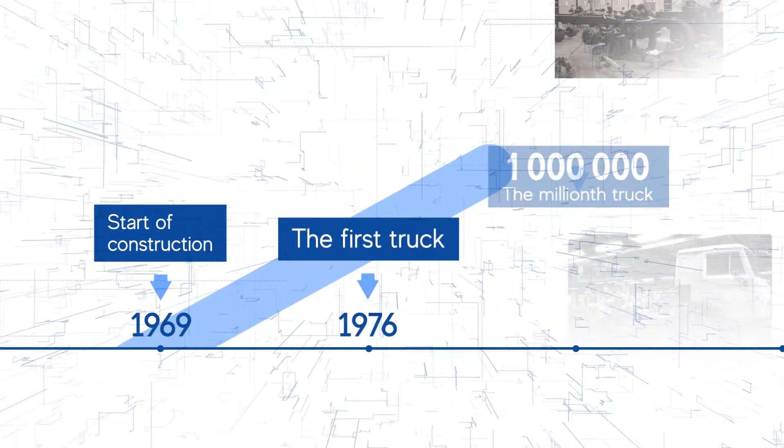As early as February 16, 1976, the first truck rolled off the plant's assembly line. A relatively short time later, KAMAZ gained the upper hand in the industry when they manufactured their 1 millionth truck. KAMAZ was built by the people, hand in hand with the whole nation.

It achieved success and passed through tough times, from which it emerged stronger and better prepared for future successes. The new era demanded enormous changes from the whole country. KAMAZ was up to the challenge, and by 2012, its production number had hit 2 million.

Today's world poses new challenges for KAMAZ. Safety, sustainability, and comfort requirements are changing. Business competition is becoming tougher. Technological standards are changing. Fully aware of the need for large-scale changes, KAMAZ is implementing a massive comprehensive re-engineering project.

The history of KAMAZ, like any other history, develops in a spiral. Several years ago, it became clear that we were approaching an era of pivotal changes. The key reasons for change were the obsolescence and physical deterioration of assets, the Fourth Industrial Revolution, and customers' new product requirements.

The re-engineering of all major processes, especially manufacturing, with the parallel development of a new modern vehicle line, is a vital tool enabling KAMAZ to enter a new historic stage. The history of vehicle manufacturing has never seen such projects, neither by scope nor diversity. Despite the hard time, we are implementing a global re-engineering project, since it's a matter of vital importance regarding the future of KAMAZ, a priority no matter what the circumstances.

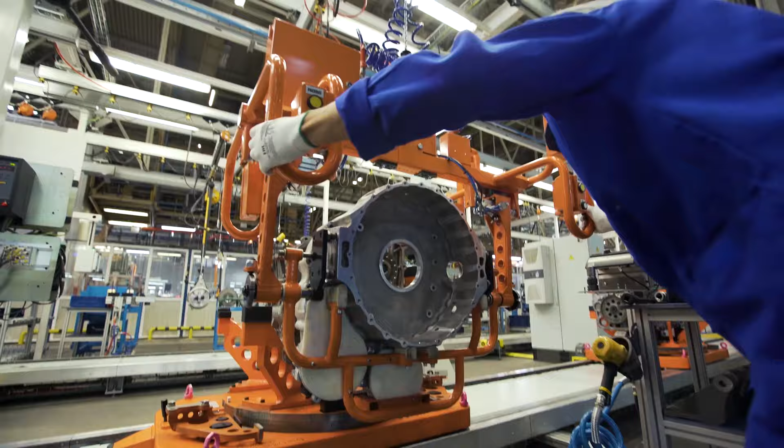Re-engineering of KAMAZ is a big and huge transformation of KAMAZ from the past into the future. What we are doing is absolutely unique in the world. We are on one side introducing a complete new truck generation with a complete new cabin, complete new engine, complete new powertrain, new frame, existing axles, and a complete new electronic architecture.

In parallel, we are introducing and executing a new IT landscape for KAMAZ, which will enable KAMAZ to develop it further on up to a level of Industry 4.0.

The R&D project is key within the framework of the Advanced KAMAZ Vehicle Line Development Project. The R&D Center answers for a full range of research and engineering activities directed towards developing vehicles that meet international standards and remain unique in many aspects.

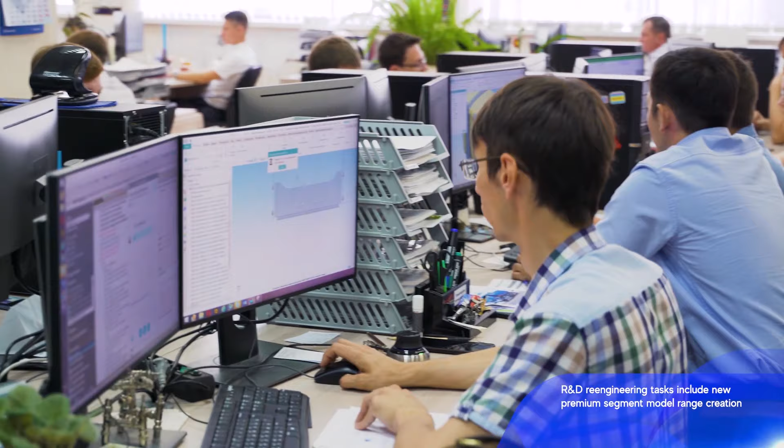The project is faced with the tasks of carrying out the research and development of K5 generation cab shell vehicles, which conform to modern interior and exterior design trends, taking over research and development in electrics and electronics for this advanced vehicle line, covering the research and development for a new generation engine family.

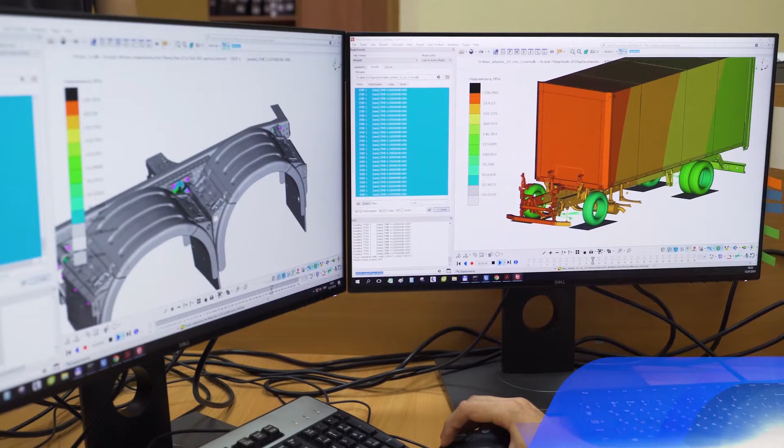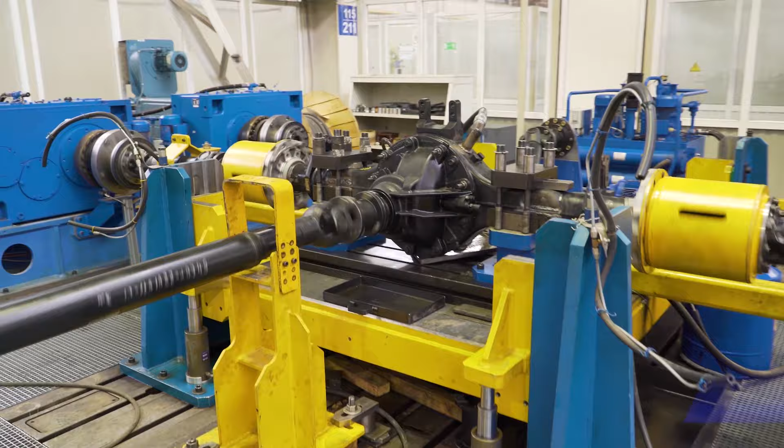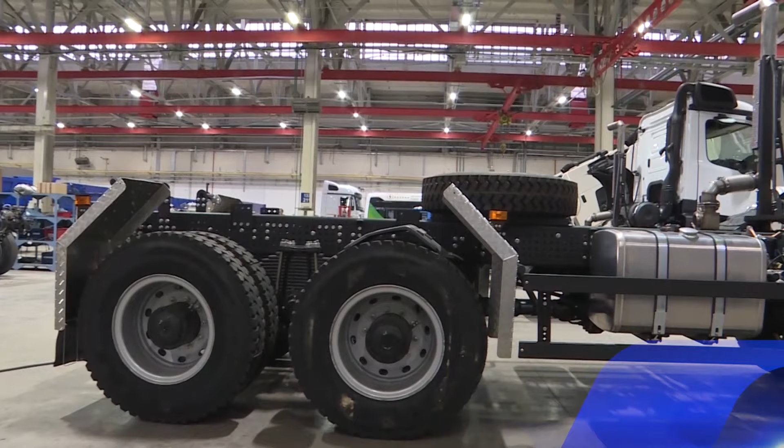The research activities, constructional design and processes engineering activities are carried out with the help of modern computer-aided design and simulation systems, which allow for the development of a new product faster and more efficiently. Designing, virtual testing, and manufacturing of a digital twin are followed by components and assemblies, bench testing, as well as test assembly of vehicles in the R&D Center.

The new model range dominates in terms of its ownership cost and cost efficiency. Service intervals have been increased by 80%. Fuel efficiency has been improved by 10%. Service life has been increased by up to 1,200,000 kilometers.

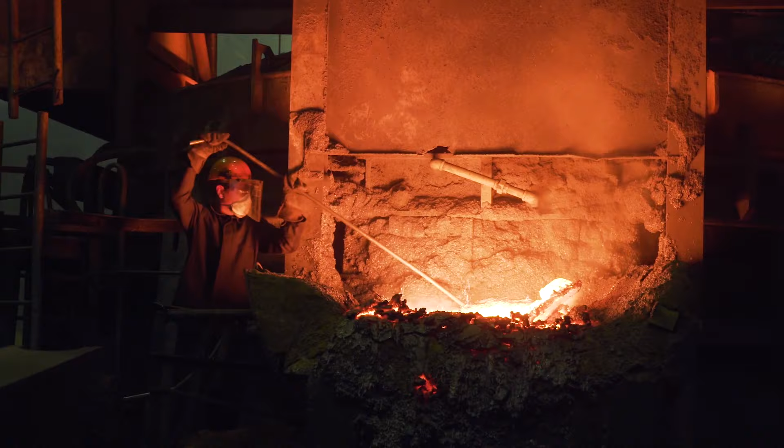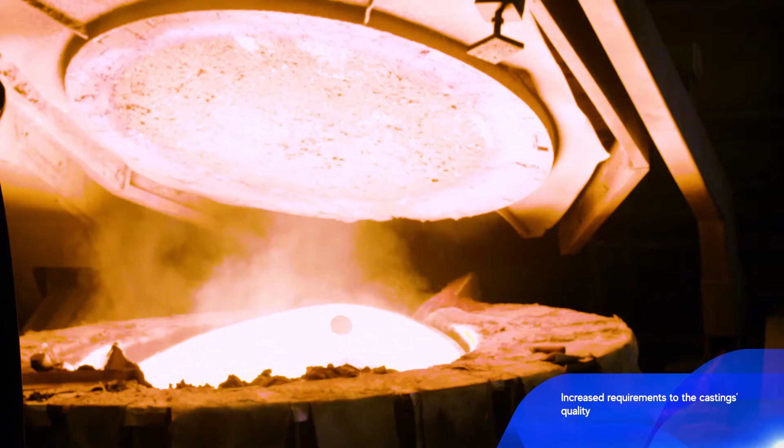KAMAZ starts at its foundry. That is why the modernization starts here. Cast iron production re-engineering provides for the development of a compact and high-performance foundry, focused on the production of intricate castings made of cast iron alloys, meeting strict casting quality requirements.

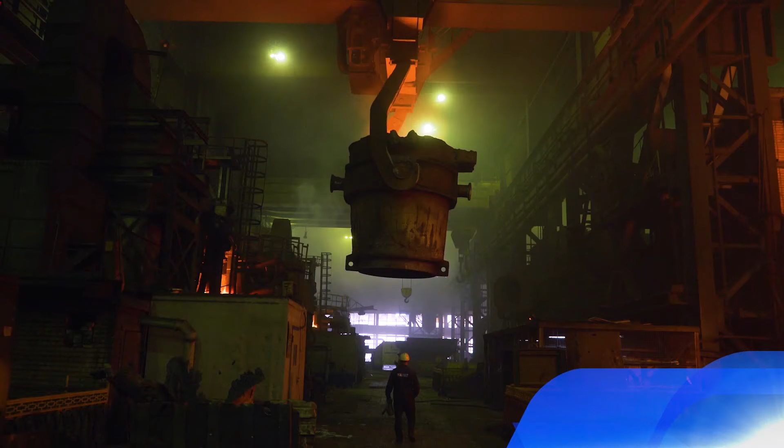Production capacity optimization due to reorganization, modernization, and new equipment procurement will allow us to significantly enhance capacity load as well as labor quality and efficiency. As part of the re-engineering of the KAMAZ truck group, the foundry will also be upgraded to feature the latest equipment and processes in the foundry industry.

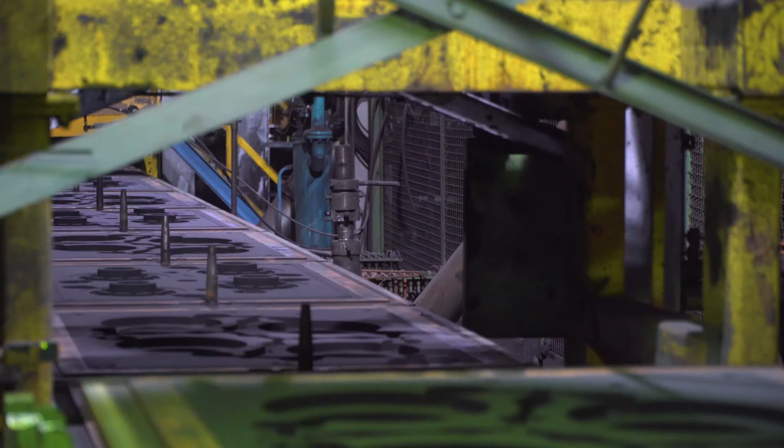The melting, molding and core shop departments will be upgraded, and we will also use software such as artificial intelligence to improve the products of KAMAZ Foundry. The re-engineering project will also enable us to cut the space needed for production premise areas in half, reduce the lack of staff and outdated equipment, all while keeping with current production volumes.

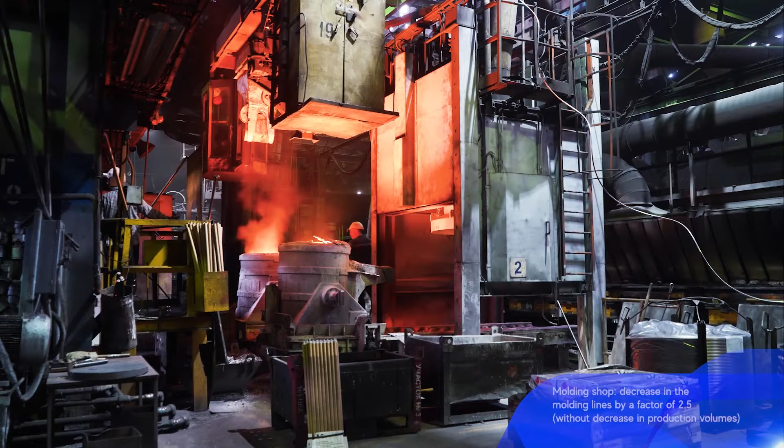For instance, take the melting shop, a 3-time decrease in the outdated melting and holding furnaces. The molding shop, a 2.5-time decrease in the molding lines. The core room, a 4-time decrease of the process equipment is planned. The equipment selection process, along with technical work, flow and foundry re-engineering is in progress.

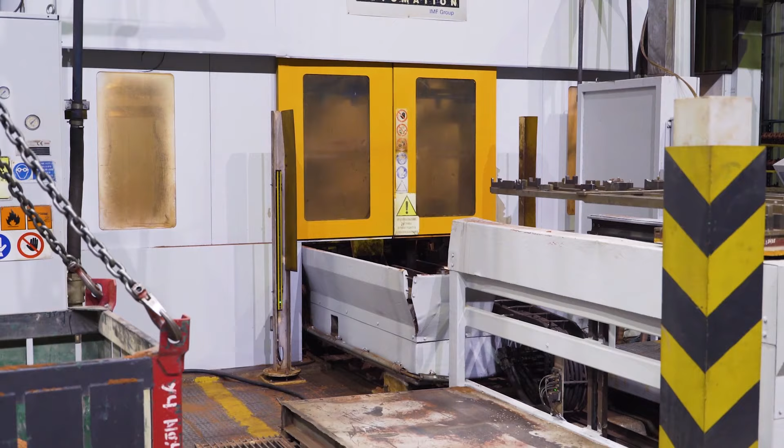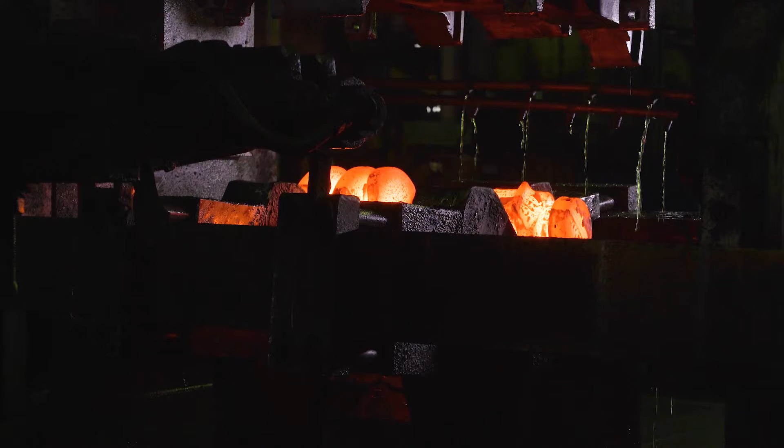Here, the most critical vehicle parts are produced. Here, the metal passes through fire and water and is forged by a force of 12,000 tons.

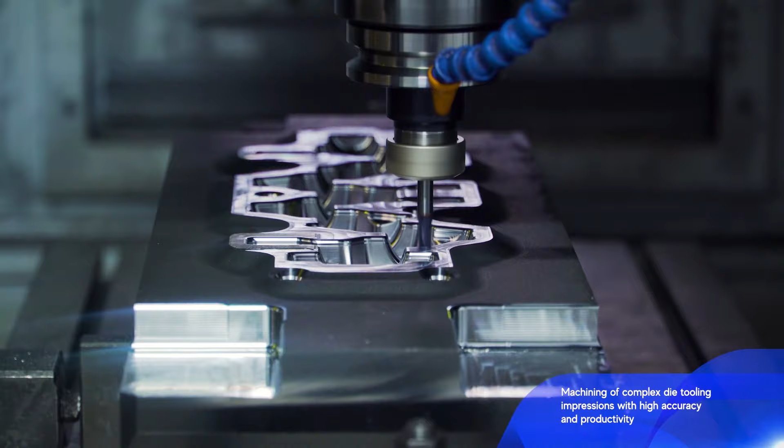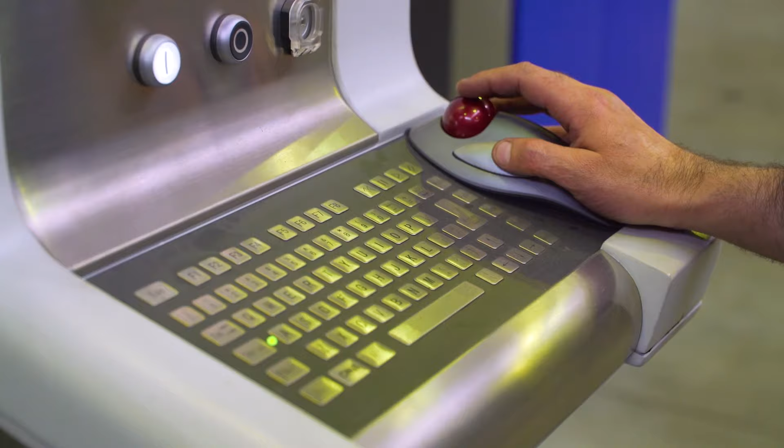The use of hot stamping processes, simulation for all forgings, and 3D designing of die tooling makes it possible to quickly perform process preparation to produce new forgings, including crankshafts. High-speed milling and tooling EDM allow processing of complex impressions of die tooling with high accuracy and low roughness, thus eliminating subsequent machining, which speeds up production, improves quality, and reduces production costs.

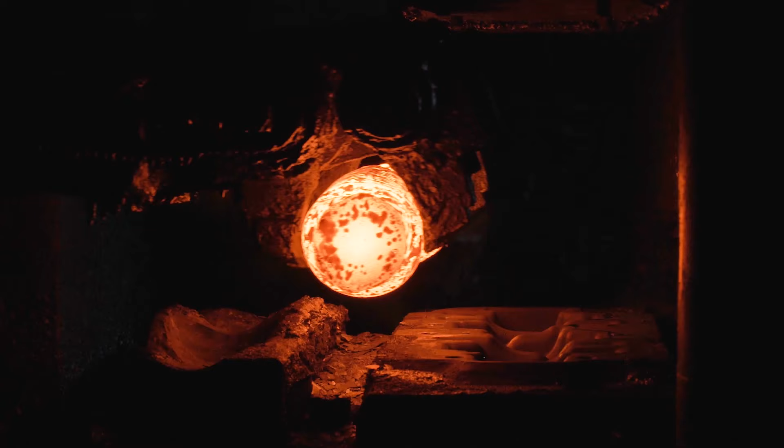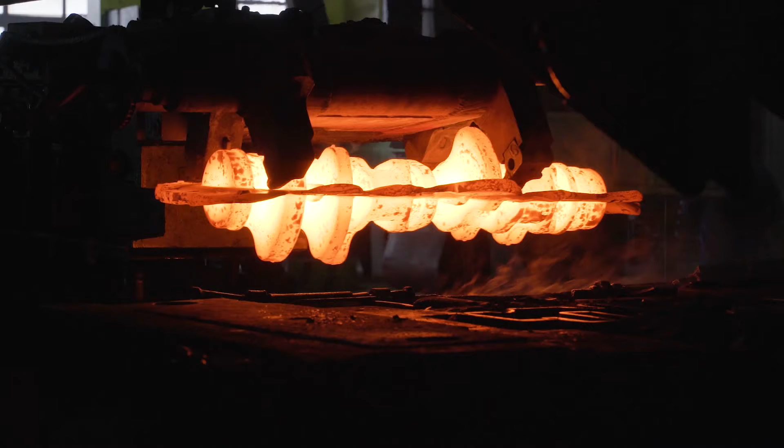An automated forging line based on a press of 12,000 tons has been in operation since 1976. The modernization of the line will ensure that the forging quality and the production process are up to international standards. Other activities mastered within the project framework include the use of self-hardening steel, controlled cooling, and heating of workpieces using thyristor frequency converters.

Engines are the heart of KAMAZ automobiles, so to ensure that they are reliable, fuel-efficient, and ecologically friendly, we use the most cutting-edge technology out there. The project for the R6 engine production is one of the most important parts of the re-engineering process. The project provides for maximum localization.

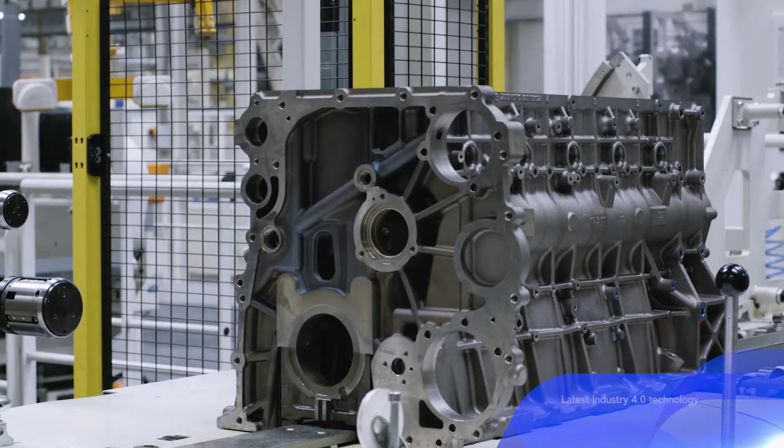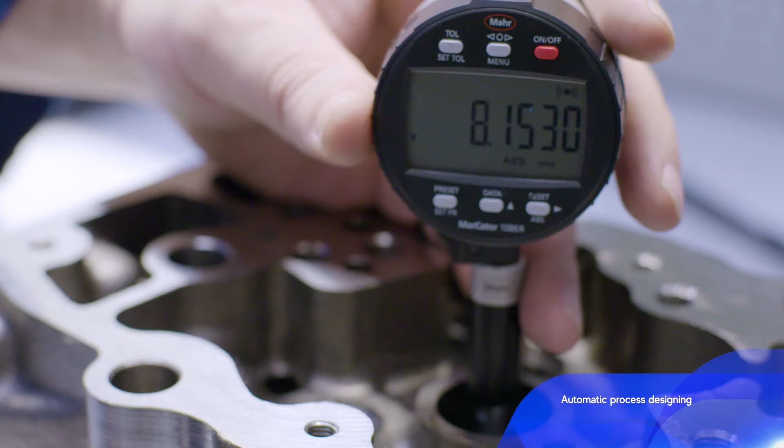State-of-the-art equipment from the most modern global machine tool manufacturers has been introduced to manufacture critical engine parts. The concept of engine parts production, assembly, and testing is based on modern technologies, rapid equipment maintenance, dimension control during machining, and production process control automation.

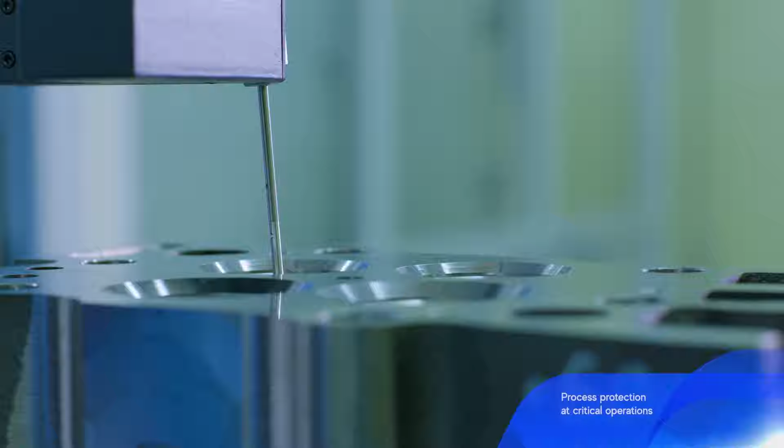Machinery is equipped with a traceability system that ensures control for compliance with the technological process. 100% control of key parameters and tool wear is provided for, along with statistical data analysis and complete equipment monitoring.

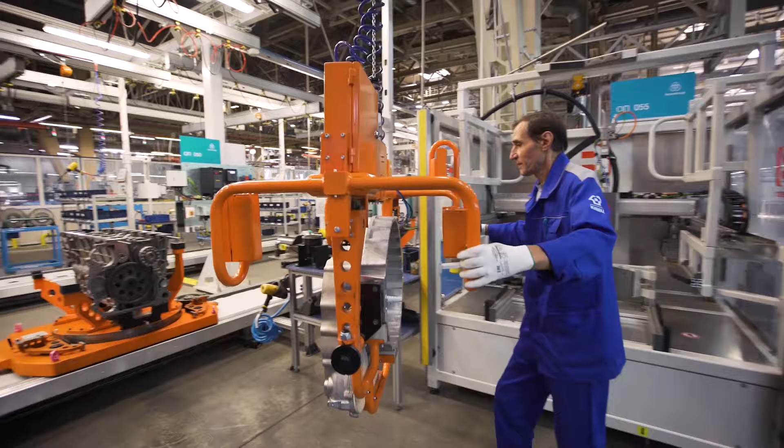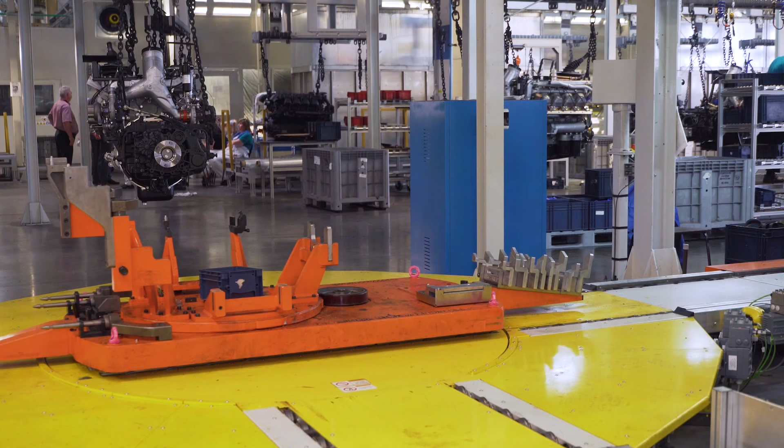The engine as well as the powertrain is assembled on pallets with the help of modern assembly systems and fixtures that are equipped with a data carrier containing assembly information.

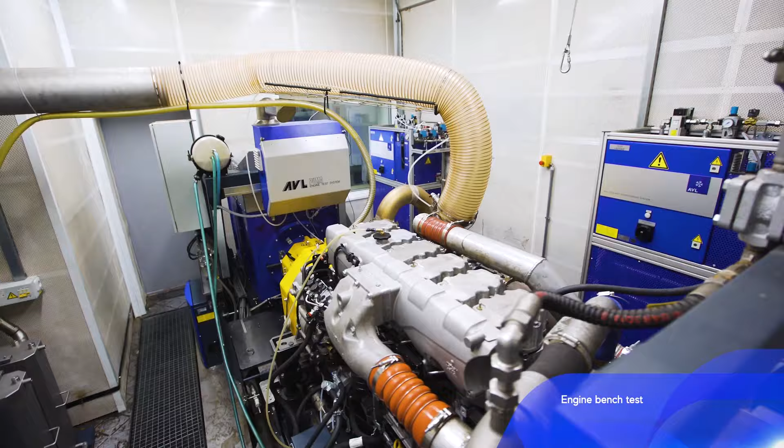To assess the actual performance of an assembled engine's operation, engine bench tests are conducted. Engine running, obtaining operational characteristics, and engine adjustment are carried out on the benches simultaneously.

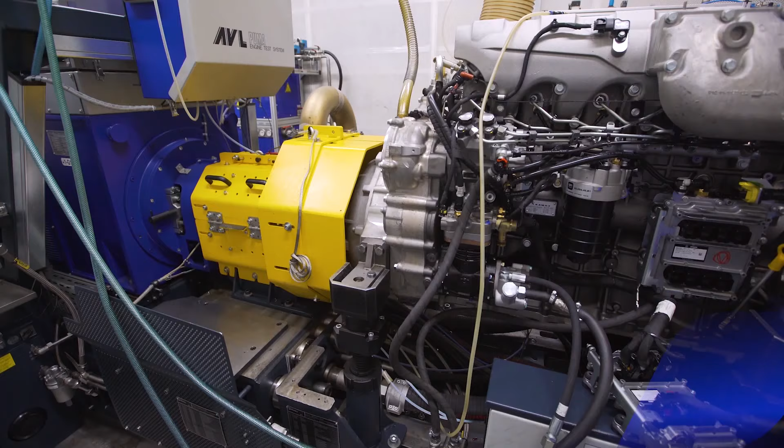The implemented technologies require a high level of personnel competence, production engineering, and production culture.

The main production shops of the press and stamp plant are welding and painting, pressing, and small series production. Re-engineering is carried out in all these areas.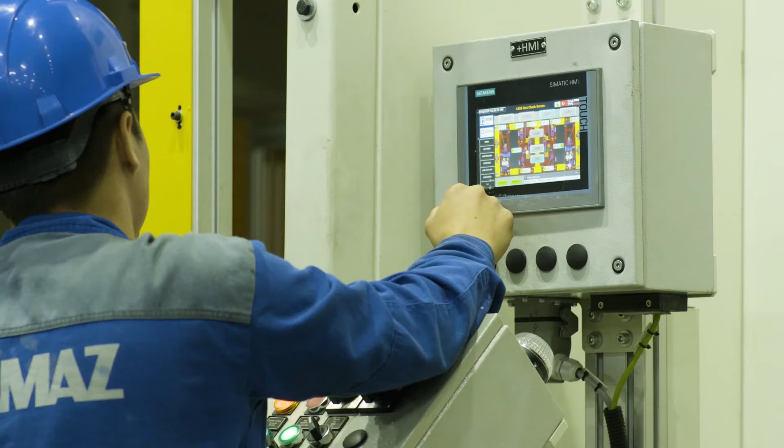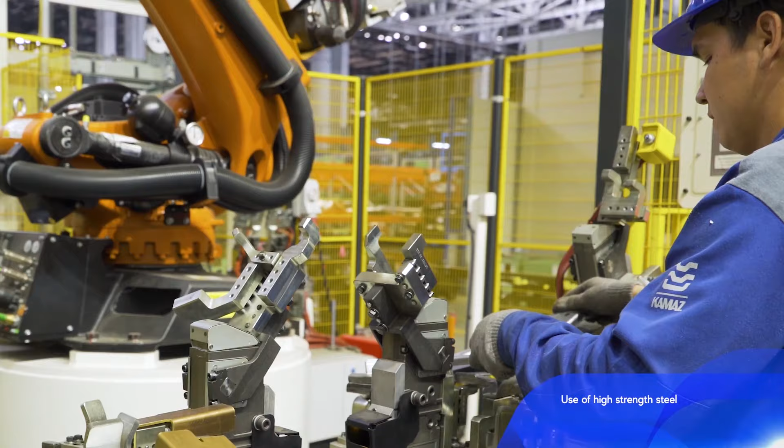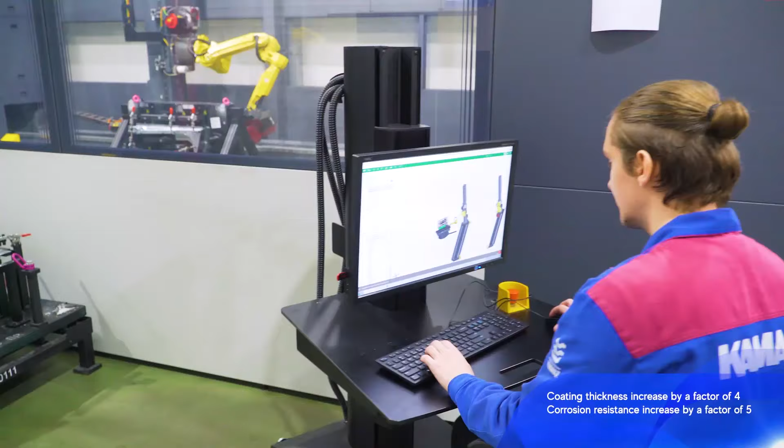As part of our press and stamp plant modernization project, a modern production facility for frame production for the new KAMAZ truck family is being set up. Key areas of focus are replacing imported products with in-house products, use of high-strength steel, a new concept of assembly line with integrated quality elements, introducing cataphoresis priming and powder coating, improving quality of coating, and increasing corrosion resistance by 5 times.

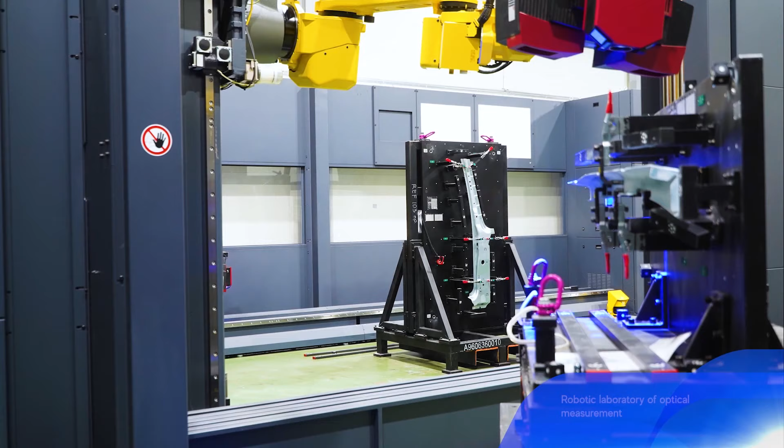The cabin in white parts localization project is an example of effects achieved thanks to KAMAZ-DAIMLER cooperation. The new production is organized to meet DAIMLER requirements for product and process stability and quality. Stamping for localized parts is gradually put into operation.

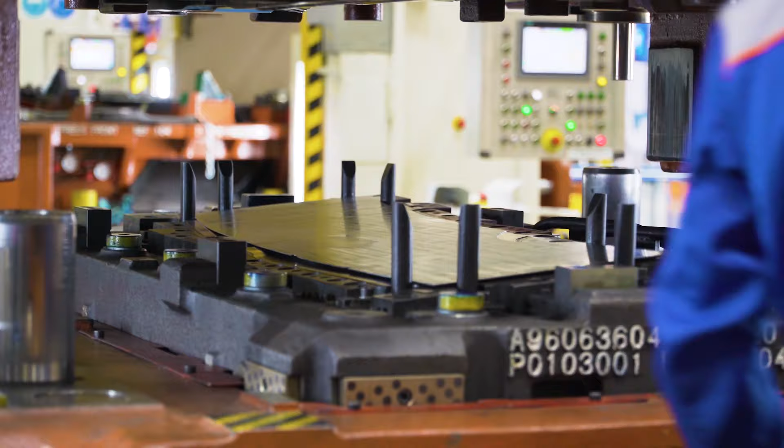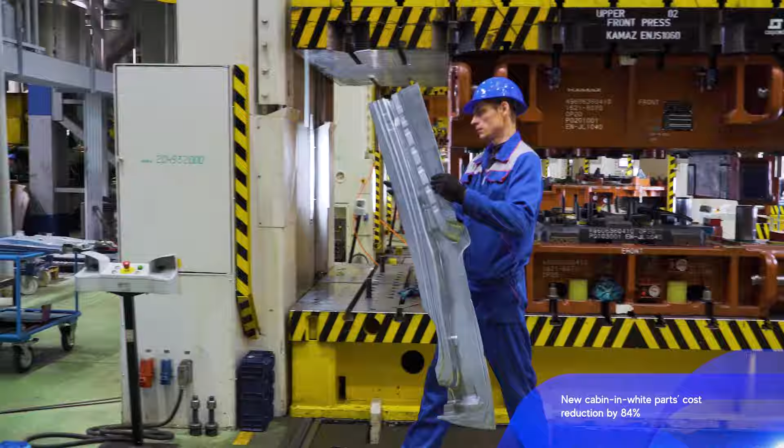Production of cabin in white parts is arranged using a modern line in the press and stamp plant. Arrangements for the localized process of new cab instrument panel crossbar welding are being made. The new production delivers products for KAMAZ and Mercedes vehicles, while fully meeting global product quality requirements.

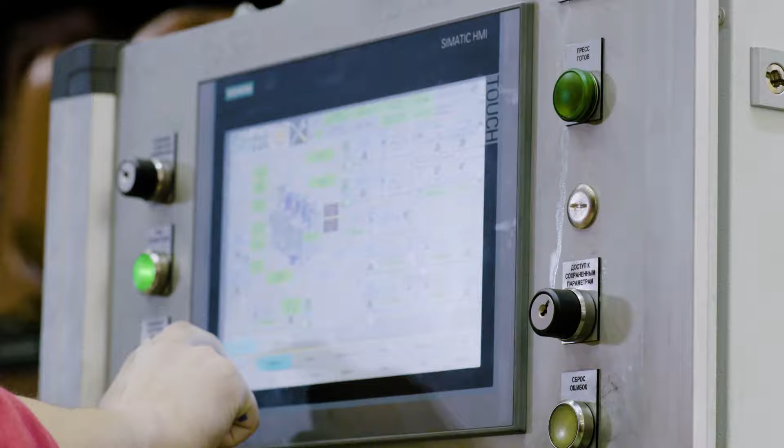A new plant at the KAMAZ production site and setup of the K5 cabin in white manufacturing plant with DAIMLER concern involvement is a key direction of automotive manufacturing re-engineering. The new Daimler KAMAZ plant, built up since the year 2015, is now ready for the start of production.

Our brand new logistics, cabin in white, and paint shop is ready to produce 55,000 cabs for Mercedes-Benz and KAMAZ. The design capacity of the plant is 55,000 cabs per year, the highest level of automation in Russia. More than 80% of processes are performed by 100 robots.

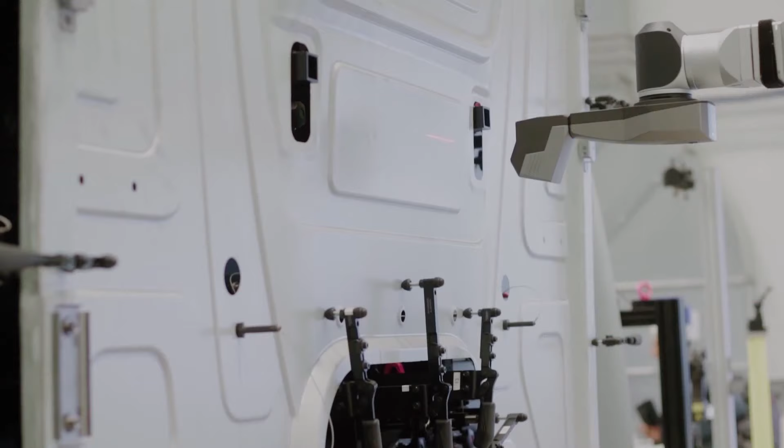The logistics center ensures a balanced production process, which starts from the cab shell welding shop conveyor. At the end of the line, 4 robots measure the geometrical dimensions of each cabin in white at 120 points and compare the results with a standard set in the program.

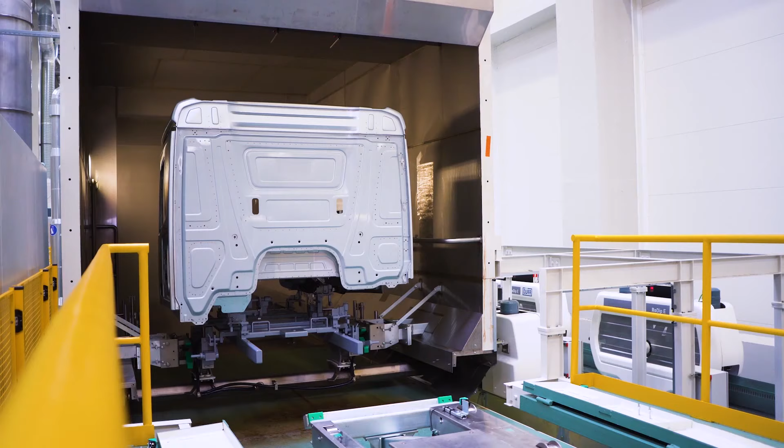Even stricter standards apply in paint chambers, where only robots are used. There is also a laboratory where material composition for surface preparation units and cataphoresis coating is constantly monitored.

80% of cab shells are delivered to the KAMAZ assembly line and 20% to the Mercedes-Benz assembly plant in Naberezhnye Chelny.

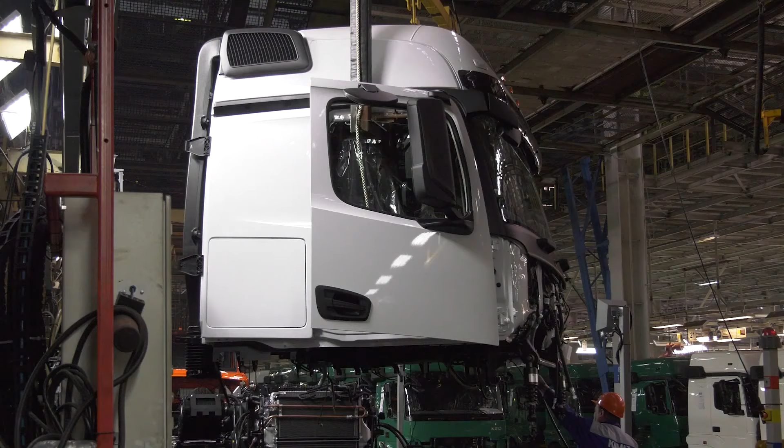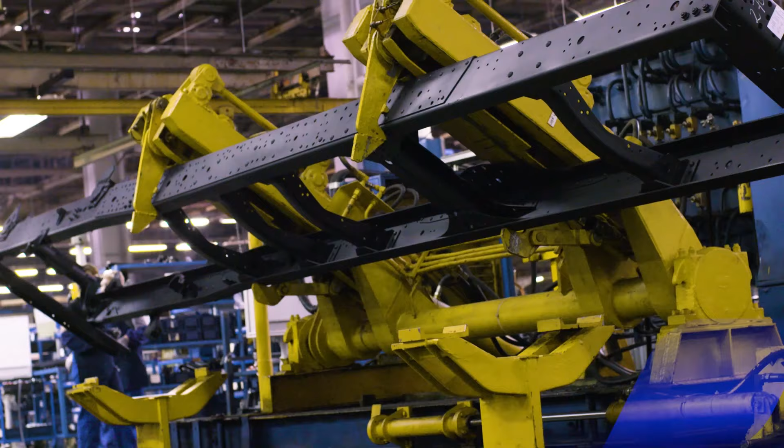The truck assembly stage combines the results of work in all directions into a final product. The result of the re-engineering project is the creation of a new assembly production that meets all the requirements of world-class truck assembly. The key project result is the creation of a modern truck assembly production system using digital control, highly organized logistics, and qualified personnel.

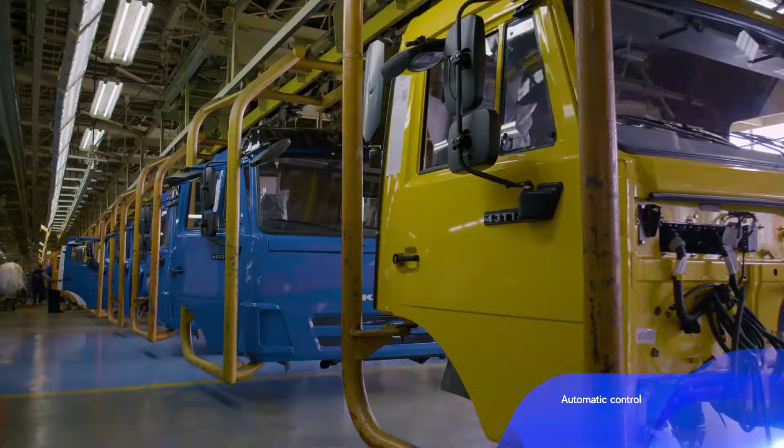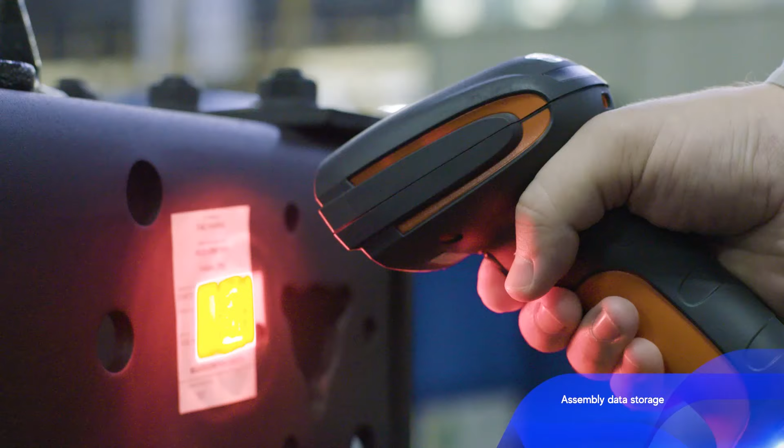The vehicle is assembled with digital support at all stages of assembly, expressed in the automatic configuration of assembly system tools for each assembled model, in automatic control and storage of assembly data, in process information support, and operator assistance. Thus, the human factor risks are minimized.

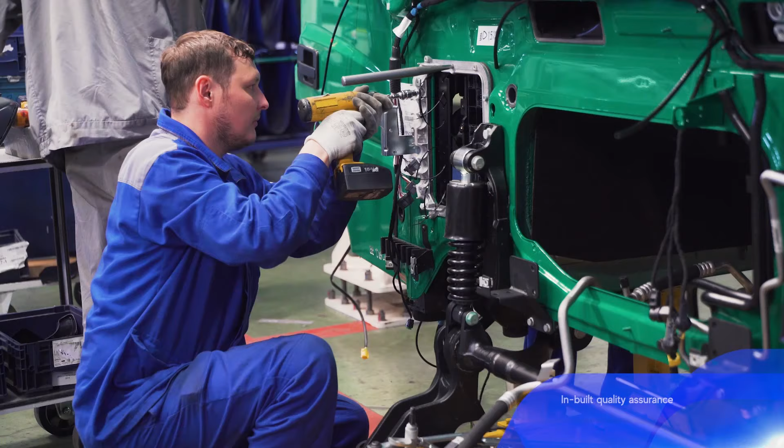Important tasks here are operational production control using mobile solutions, product quality control in real time, and traceability of products. The new model range has become structurally and technologically more complex and requires highly qualified personnel and effective production organization.

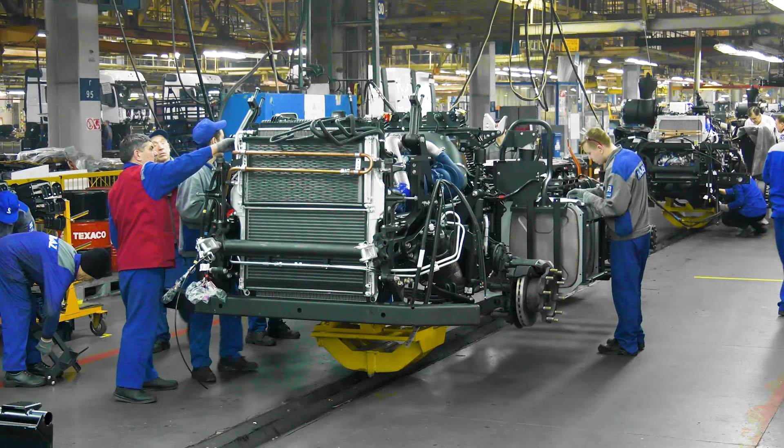In addition, the level of KAMAZ vehicles' electrical equipment and electronic components is worth mentioning. In this regard, trucks of the advanced family require high-tech comprehensive testing and tuning of electronic control units and electronic vehicle systems, as well as testing at test benches.

For this purpose, an end-of-line system is introduced in production now, which will make it possible to solve the above issues and is one of the important elements of the re-engineering project.

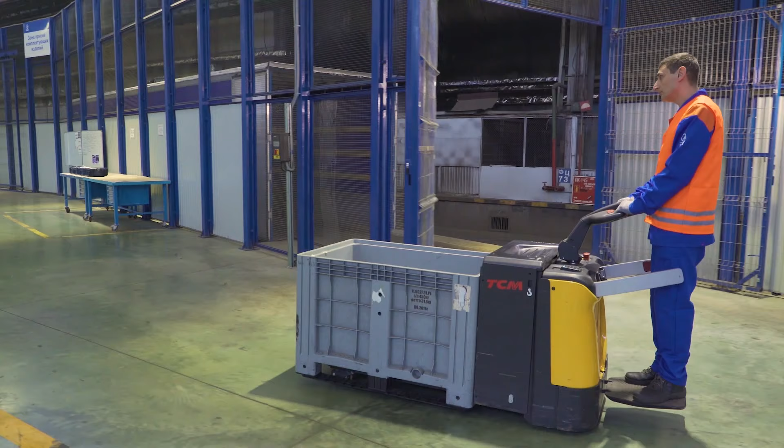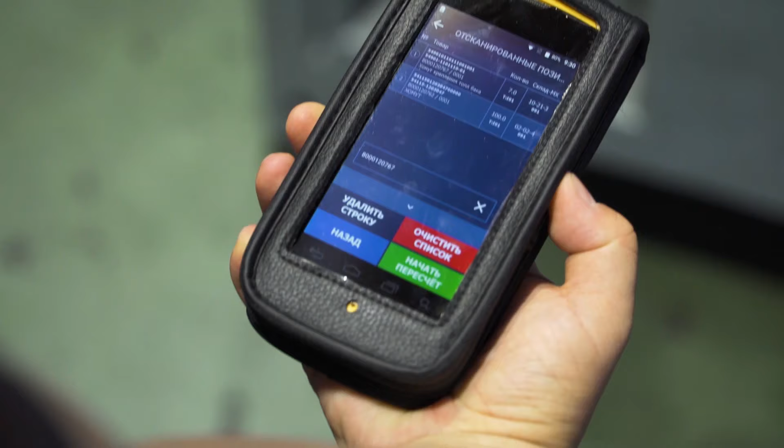All activities within the KAMAZ Reengineering project—the transition to a new model range, development of new technologies and processes, creation of new productions, and quality requirements—present challenges for logistics. Logistics should be on par with the new KAMAZ technological level. KAMAZ specialists have developed a concept and strategy for production logistics development, fully integrated into other reengineering projects.

Key points in the logistics project include maximum avoidance of manual labor. Logistics experts use digital modeling and simulation programs to find the best solutions. Other priorities include modernization and creation of infrastructure, unification of processes and solutions, and IT logistics based on SAP solutions with electronic document management.

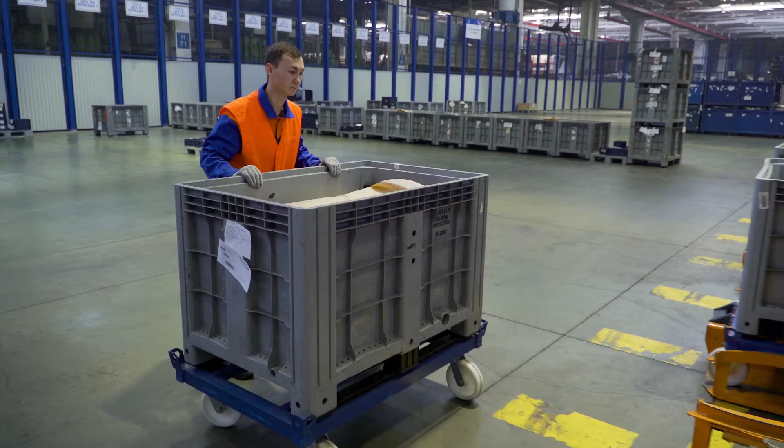The achieved effects, as illustrated by a new chassis assembly warehouse, are as follows: the utilization ratio of the warehouse area has increased by a factor of 2.5, productivity of order consolidation has doubled, and the number of errors in order consolidation has been reduced by a factor of 3.

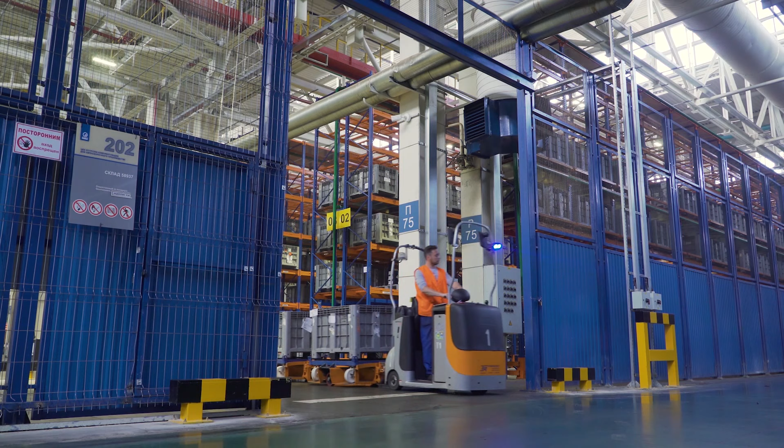The logistics project is mainly focused on standard, easily scalable solutions, flexibility in operations, and quick adaptation to changes in production and technology. For the first time in KAMAZ practice, logistics flows are designed simultaneously with product designing.

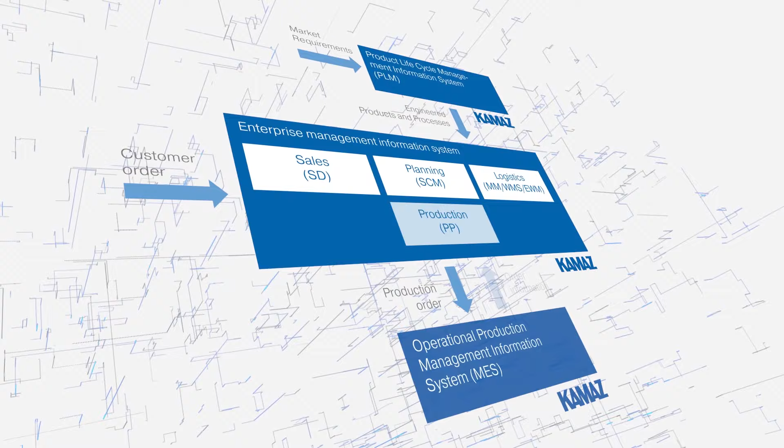As part of reengineering, KAMAZ implements a program of projects aimed at developing a process control information system intended for the whole product lifecycle. Information technology is an integral part of our modern enterprise management system. Product designing is carried out in the form of a three-dimensional model, taking into account all market requirements, along with the necessary engineering calculations and virtual tests.

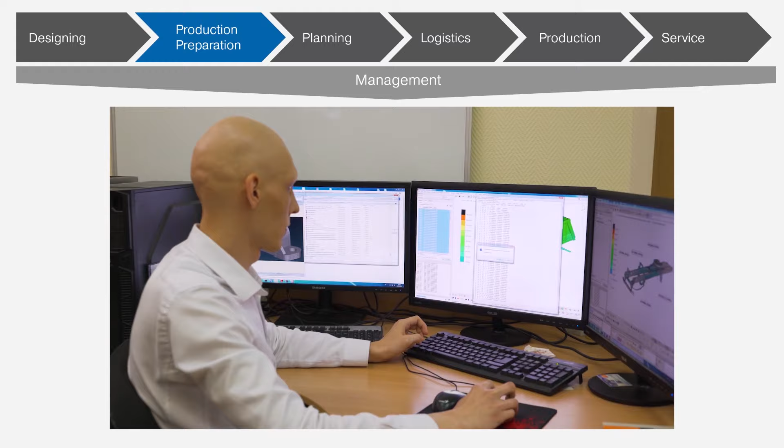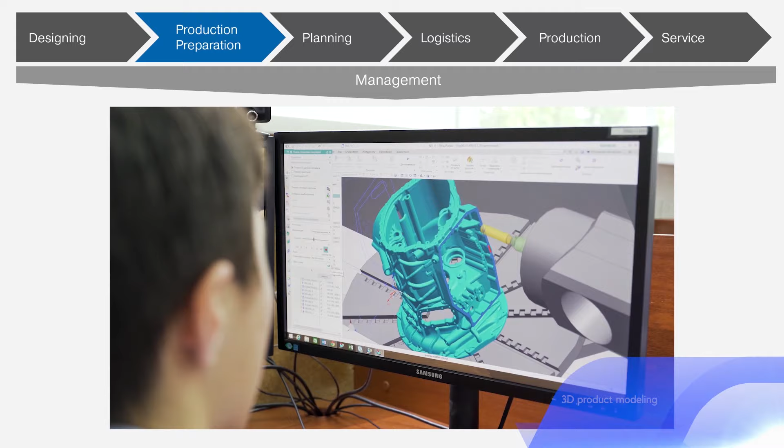The joint work of engineers and data storage is done in the Teamcenter corporate data management system. Based on the 3D model of products, the Teamcenter system launches a production preparation process and develops an electronic technological process, including its quality check during modeling. Upon completion, all data is transferred to the corporate enterprise management system based on the SAP platform.

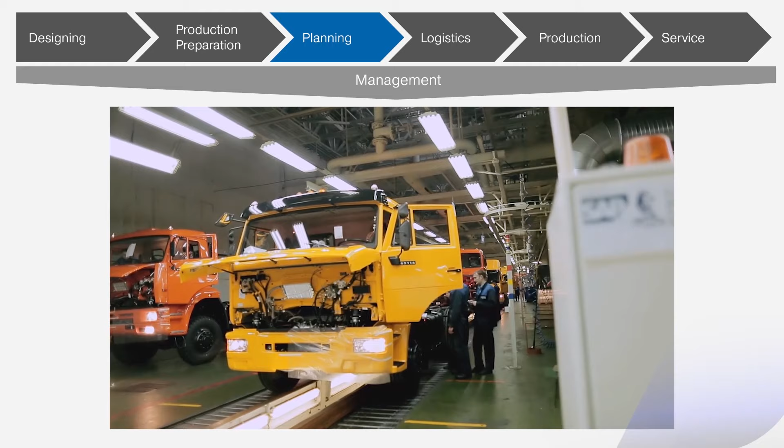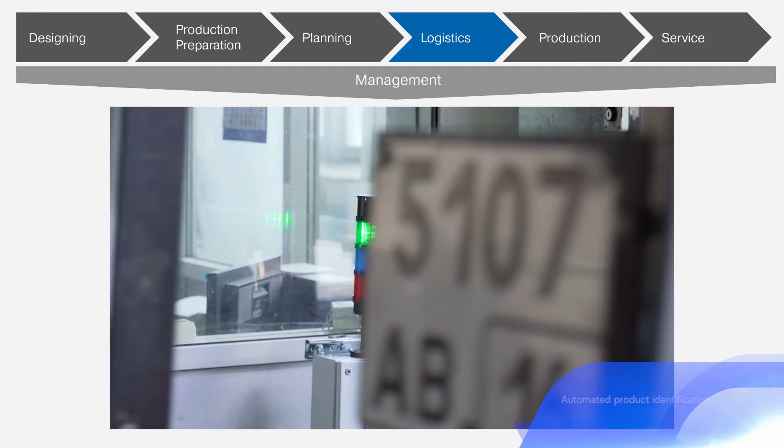After each customer order, a portfolio is formed in the SAP system, launching a process of creating the optimal production and supply schedule that takes into account all the restrictions. Automated product identification systems are used for components delivery, and their movement is controlled in the warehouse management system based on the SAP platform using modern mobile solutions.

KAMAZ PTC is actively introducing modern IT solutions in production. Priority tasks are operational production management using mobile solutions, real-time product quality control, and product traceability.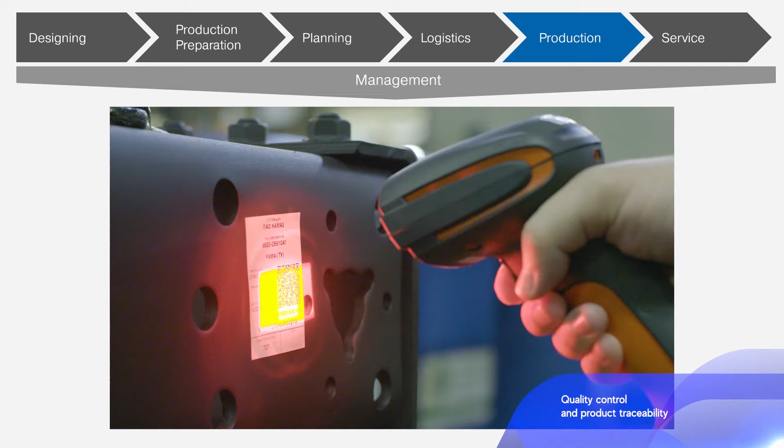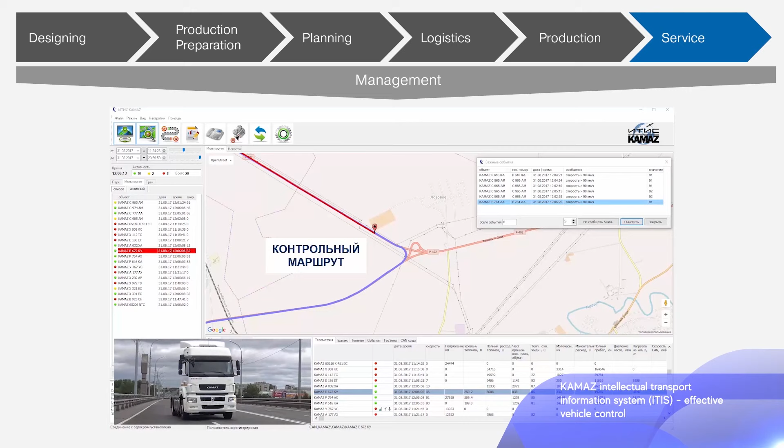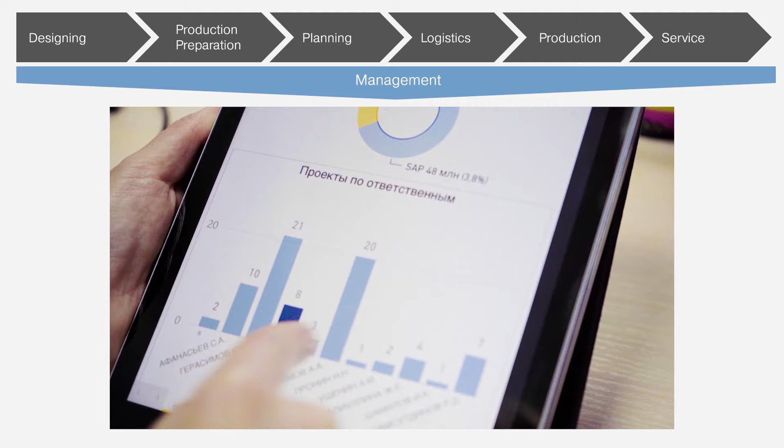Further vehicle service is based on designing data as well as actual data obtained from production. KAMAZ is actively working on the development of high-quality service according to the connected vehicle concept, based on its own software platform. To quickly obtain reliable information and make managerial decisions, KAMAZ PTC uses and actively develops manager monitors using mobile solutions. Digital technology, big data, and artificial intelligence bring our business and our customers' business to a new efficiency level.

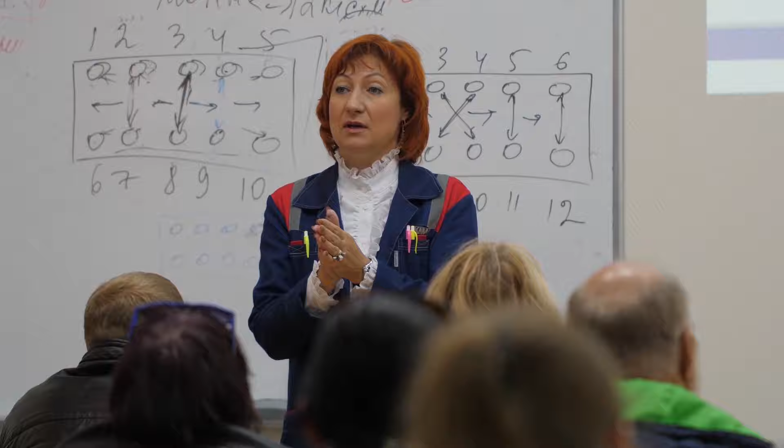Before the launch of the new KAMAZ vehicle model range into mass production, several specialized training sites were created. People, qualified personnel, are the basis for the success of KAMAZ reengineering. In this regard, a new model of personnel training has been created and implemented. Training for new employees begins in the Multifunctional Center for Applied Qualifications, MCAQ.

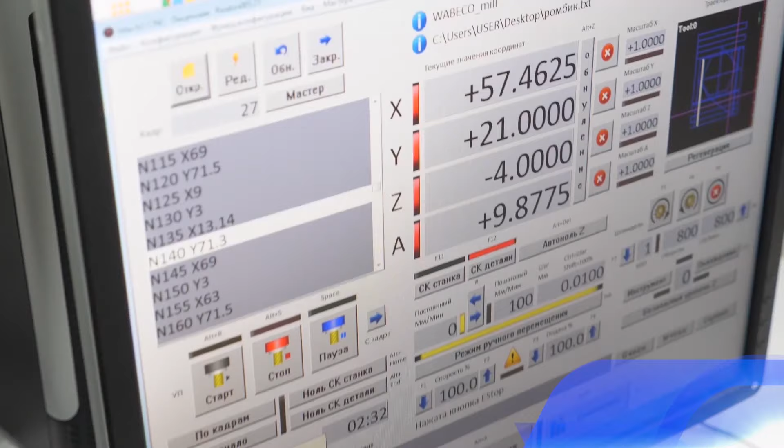The purpose of its creation is training in basic knowledge and skills in all relevant professions of KAMAZ PTC. MCAQ is a systematically organized training system with 15 modern workshops and more than 150 training programs, having trained more than 9,000 persons in the first 3 years of operation.

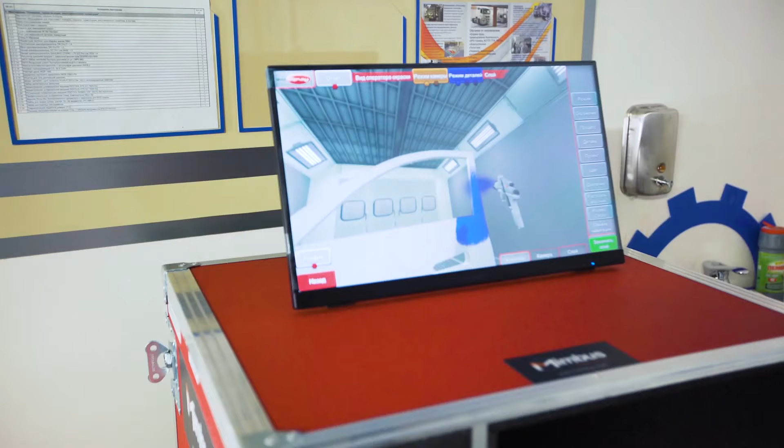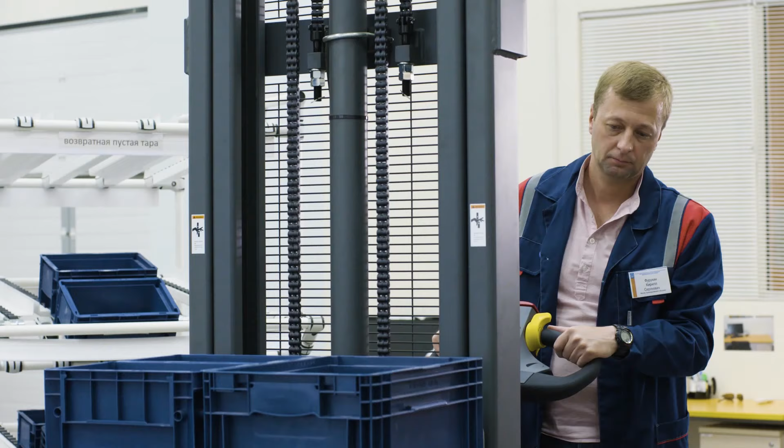The MCAQ implements the basic principles of the new KAMAZ training model, introducing the new KAMAZ production system and quality assurance principles at all stages of the educational process.

The Educational and Technological Complex is a unique educational factory within a real factory. It provides training in production skills in conditions similar to real production. Based on the results, an assessment is made of personnel readiness to perform operations in KAMAZ's modern production environment.

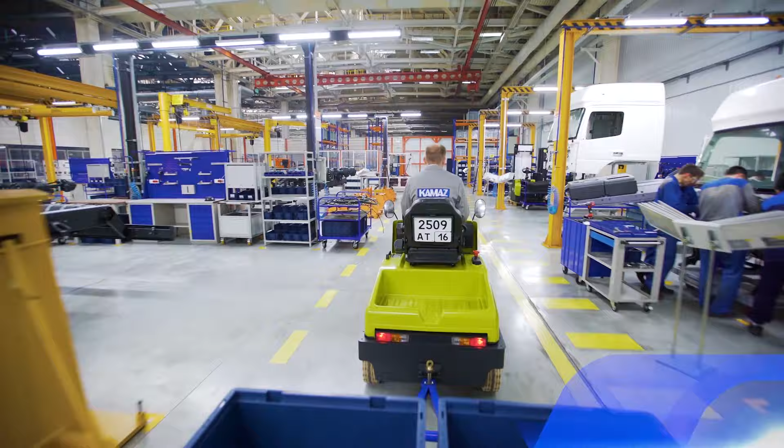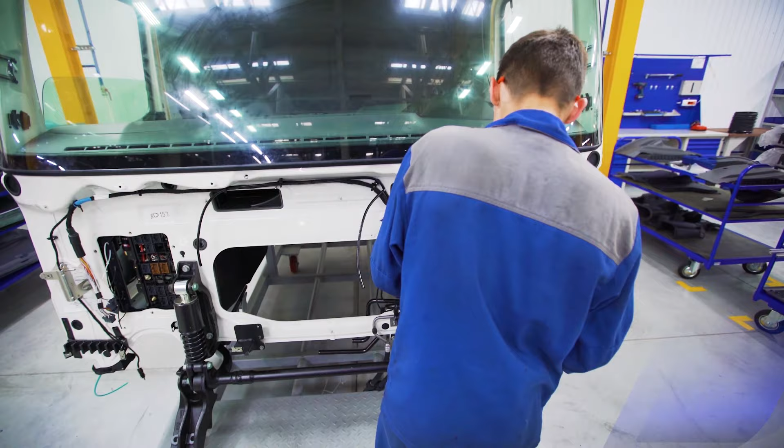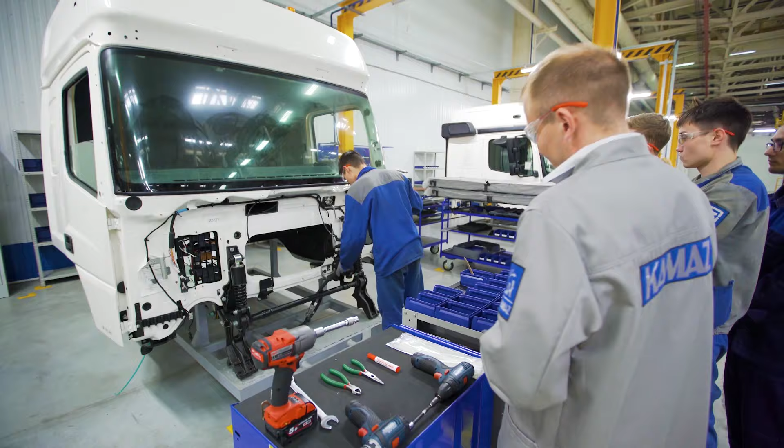The Educational and Technological Complex provides training on new products and technologies. Students get industrial experience, and during the first months of its operation, over 800 people were trained there. The training meets common corporate standards and KAMAZ ideology. The new training system is of international standard and is able to meet KAMAZ's current and future needs for qualified personnel.

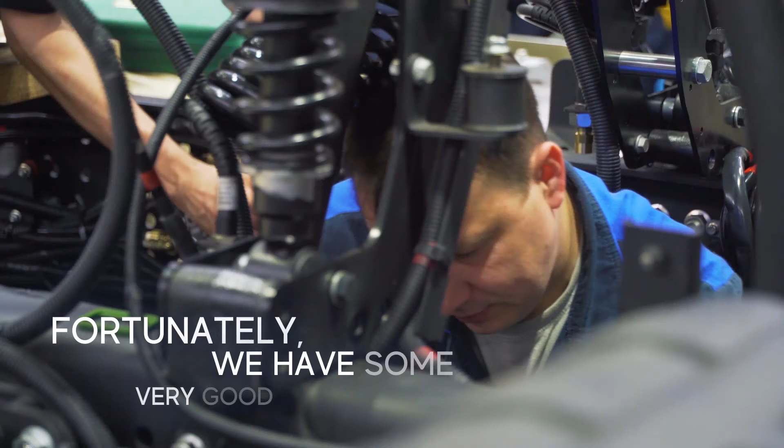The most important thing for us, of course, is our staff. Fortunately, we have very good people, very good employees who love their jobs, love their product, and love to create it. We pay great attention to training and raising our personnel's comprehension of our product and our technologies. This is the key element of our project.

Reengineering is giving a new life to KAMAZ, and it will never stop.